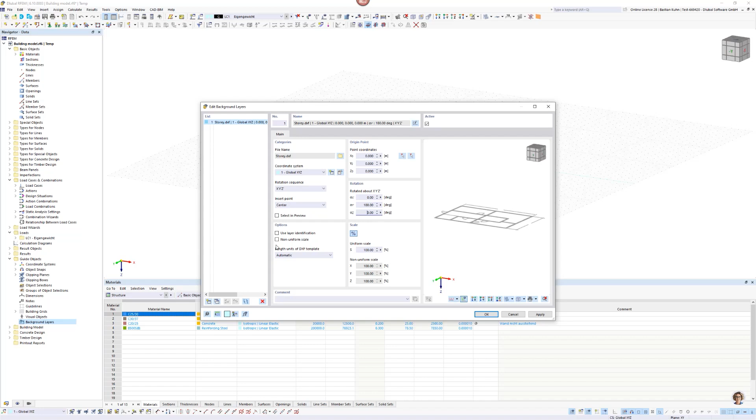When you start modeling a structure, you usually do this via DXF import. It's possible via File, Import, using the import functions, or what's even smarter is to go to Guide Objects and import background layers. I have a predefined DXF named Storey. I will change the rotation about 180 degrees to have it on the other side. I can check if I have separate layers, which is the case here, and import it. I will directly move into the Z direction.

Now, looking at the left side of this building, I will define my stiffening walls, my stiffening elements. It goes from the left top corner to the middle corner, the bottom middle, and the left bottom side - that's where my stiffening core of the structure will be. On the right side, I will create the facade elements.

Before modeling it, I have to go into the objects of the building model and define my stories. I want to define 5 stories, with each story having a height of 3 meters. So 1, 2, 3, 4, 5.

We have several options for floor modeling. I'll explain them all when we get there, but we'll start with floor modeling set to nothing, which is just an advanced output of the structure. The other modeling types - rigid, diaphragm, semi-rigid, and also load transfer - require or generate different modeling. Then, of course, when we have rigid or semi-rigid diaphragm, we can also have different nodal support modeling and different line support modeling. But I will show all of that later on.

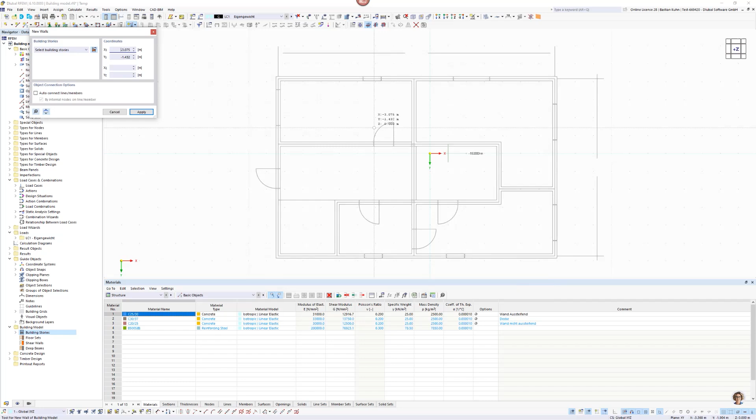And I will now start from the middle top corner. I also have to select the building stories. I will define them all.

I will skip the window, so here's the window to be situated. With the building story or building model add-on, there's already the information of the mass of my structure. Right now I define two walls, or two parts of the wall, and I have a complete weight or mass of 9.72 tons. When I'm moving it out a little bit, that's not enough, but maybe we can go a little further in here. So you see the mass center is moving while I'm defining more surfaces. That's information already generated by the building model add-on.

Okay, so I have to do this now for each of these parts for the complete kernel, and to this edge, to this edge, and from this to this. So my building is closed now, and you see that the mass point or mass center is nearly in the middle of the structure, and I already have a weight of 42 tons.

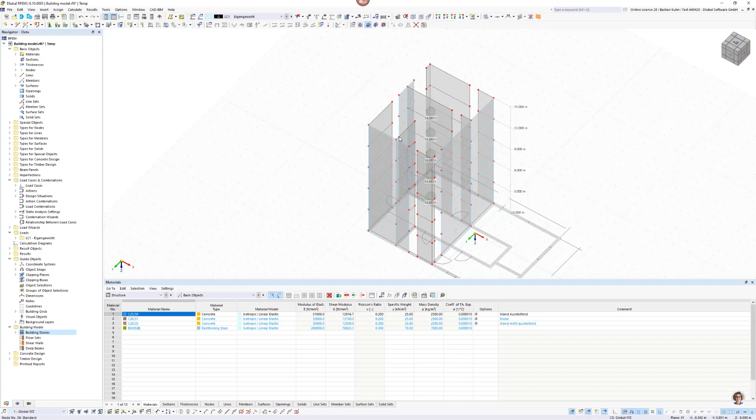And of course, in this case, we will need a few more posts, and maybe we will put some kind of drywall or masonry wall or something like this on this part in order to reduce the free span, because if I do not activate these walls in here, I will probably get problems with the deflection or vibration of my structure.

So I will proceed with the columns. Therefore I will define, well, quite a bigger section inside here. Let's say we will create a new section and give it the dimension 275 by 275. We can use timber material here, the so-called Baubuche, which is perfect if you have quite a high pressure force there.

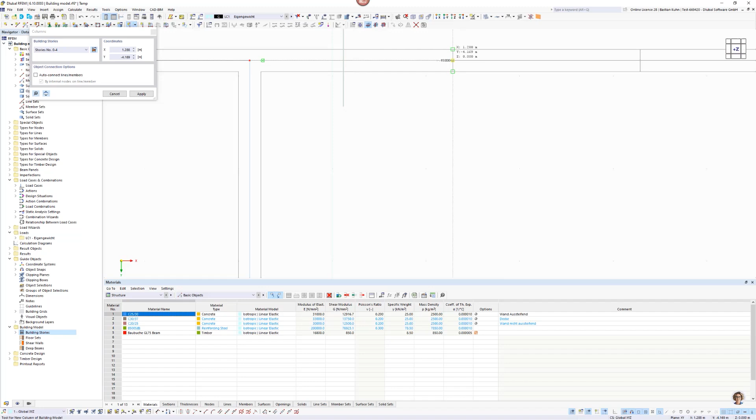And I can take a look if all stories are activated. That is the case in here. So I will say, okay, I probably have a column in here, and a column there, and one on the edge here. And where else can we have one? Yeah, probably here. This. This. This. This.

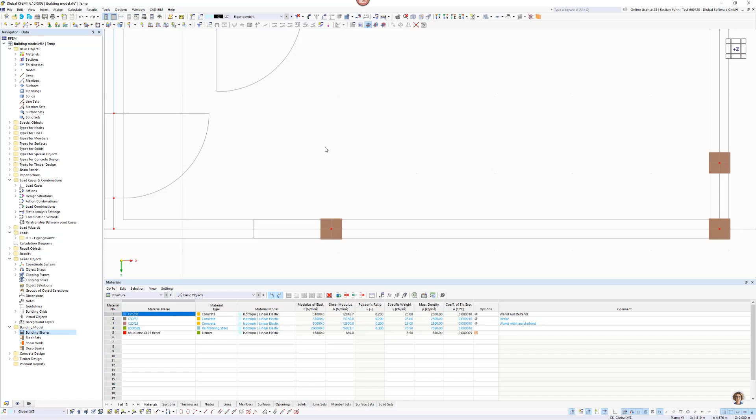Oops, that was wrong. Oh, I can just go one step back. And that's still working. Okay, so these are my columns. This one's actually a little too narrow to me, I will undo this step. So that should be enough for this now.

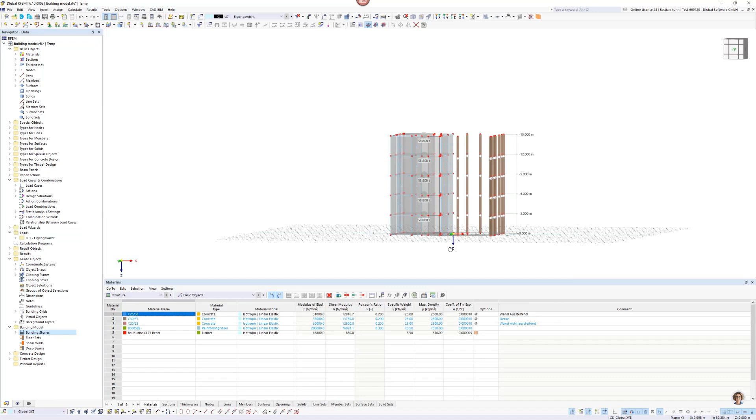I can directly put a hinge on top of those columns so that they will not bear any moment transfer. So I say, okay, hold on, not the walls, I only want to activate the members. Edit, and define a hinge at the member, just a simple ordinary moment hinge. Okay, so that works.

And go back into the Z direction, or maybe I will define now already the supports, at least the column supports. That is also just a hinged support here. Okay.

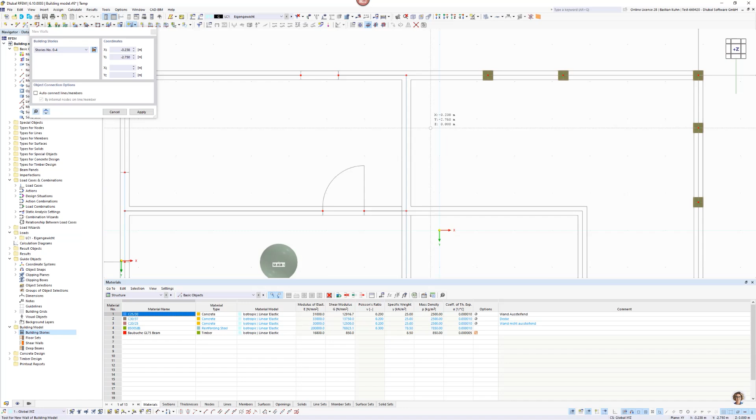So the load transfer surface can be quite simple in here, from this edge to this edge, and to the bottom edge.

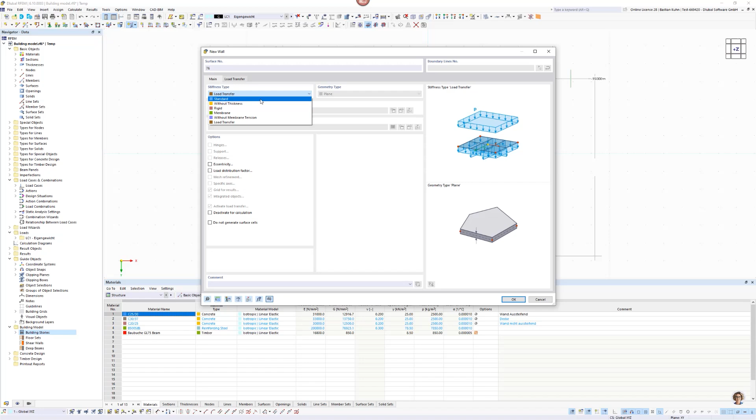Okay, so it's also there. And I said here in this area, I want walls that do not stiffen my structure. They should only transfer the forces from the top story to the ground.

So therefore, I will define again the load type wall, but with standard behavior, and create a new thickness called wall shear free. The picture slightly explains this thickness type, which can transfer forces into the global X and Y direction of the wall element.

I'm choosing a different material, let's say wall not stiffening, and it can be a little bit bigger. Let's take a look at what I wanted to have inside it. Let's say, okay, we will take it 175.

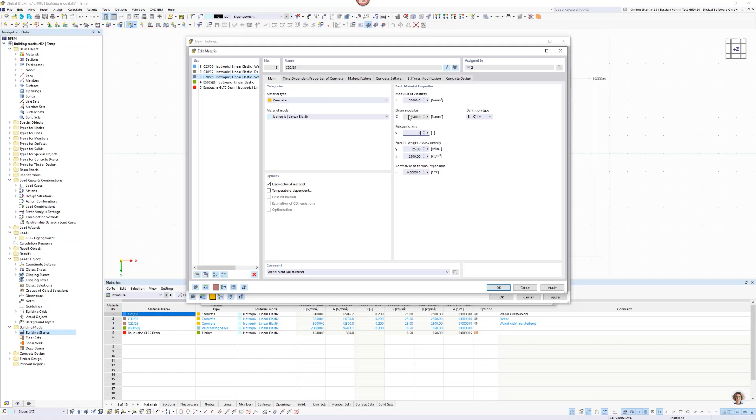We will take a look at the material and get rid of the Poisson's ratio in order not to get too many effects to the stiffness matrix. Just for your information, there's a generated stiffness matrix from this thickness type, which only has stiffness in X and Y direction of the surface. So that's how the forces are transferred. There will be no bending stiffness, or nearly no bending stiffness, which means in case there is force out of the plane, it will get a high deformation, but this can be ignored. It only transfers force from this edge to this edge.

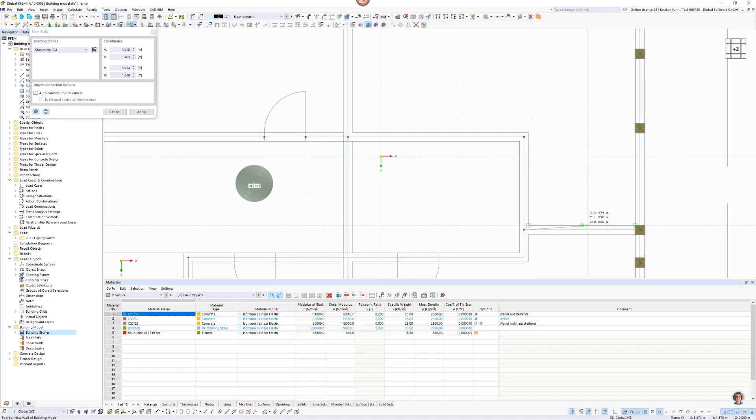So then I'm defining the first selection here, the first wall there, and this should be from this part to this part, and this to this. Did I activate all the stories? Yes, I think so. Okay. And from here to here, and here to there. So now my walls are defined.

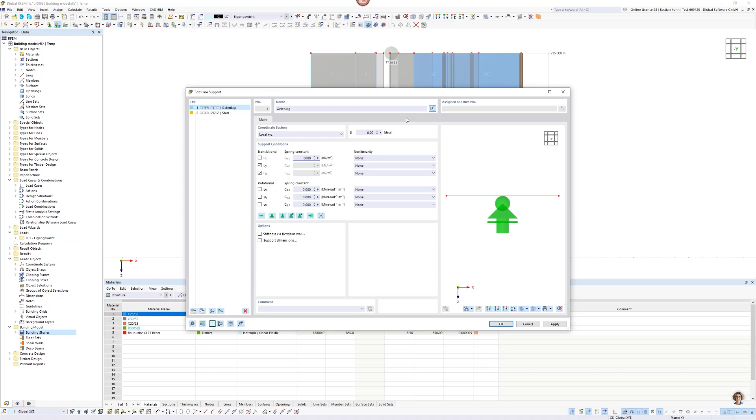And I would like to add the supports on it. For the supports, I'm choosing a line support with local orientation here. In case I'm using timber material later on, I will have to do it anyway, but I also could use a spring constant for the concrete, just to not have it statically over-determined so many times. That's also an advantage of this.

Now hold on, maybe we don't want to see the load transfer surface, because that will just cause effects we don't want. Therefore, I'm activating the load transfer show reverse visibility. So this avoids that. That looks quite good to me, and the local orientation helps also with this.

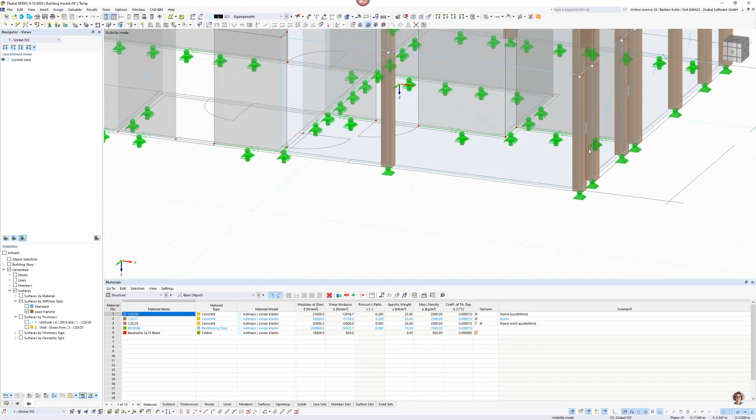Hold on, yeah, that did not work, but okay, of course I can also delete it manually in here. This is okay, this is okay, and here on this side, that can also be. So that's, we just don't need it. It would just cause an alert, so it's not problematic, but I just want to avoid this.

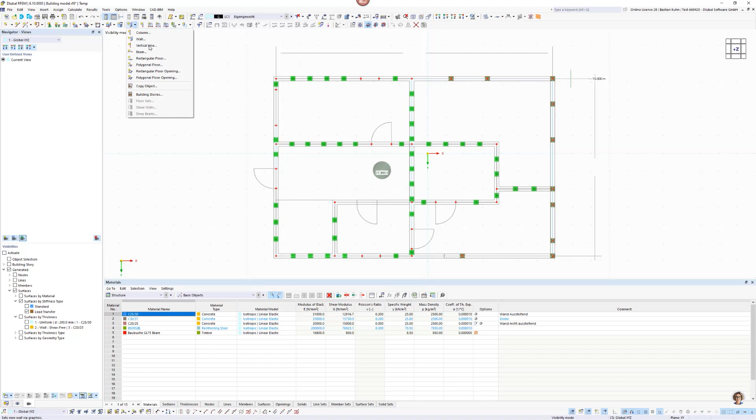Okay, we go back into the Z direction. We could have also looked for the supports there, that would also be possible. And the last part is the modeling of the floor.

We choose it rectangular to keep it simplified, and define a new thickness, uniform, floor with a dimension of optimistically 250 millimeter thickness, and go from the left top corner to the right bottom. Oh, that's not good.

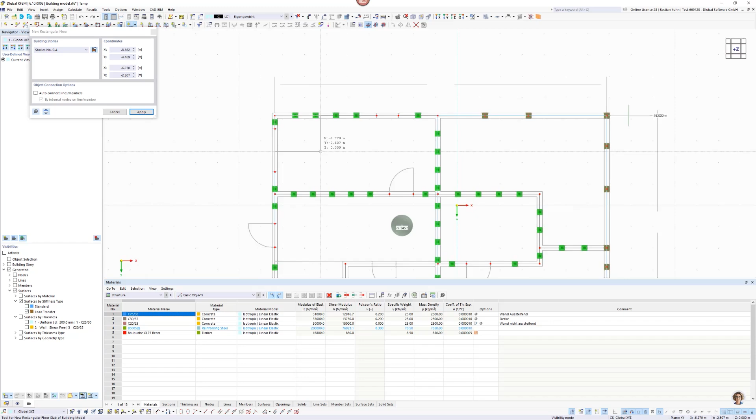That we have to do again. Sorry, I was too quick in selecting it. Okay, maybe zoom in a little bit, and this does not happen.

So now the structure is done. Each story has a mass of 172 tons. This is it, and now we have to look at the loading.

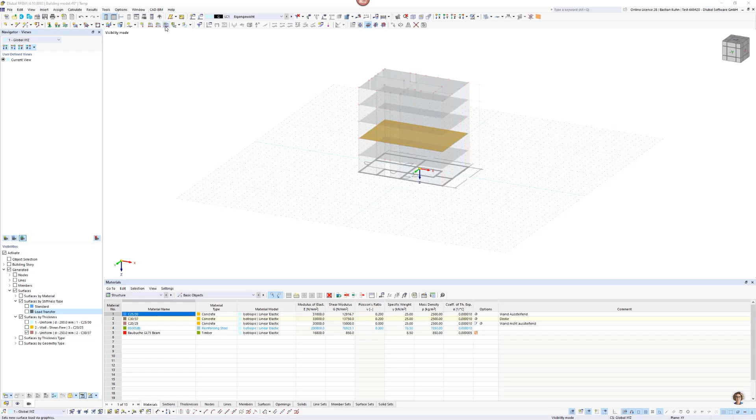Therefore, I will only activate my floor for the first load case and will define the load in it. So there I can use a simple surface load in here with a value. Hold on, I also have to look at what I defined in here.

So not so much load, 1.5. Oh come on, is it not selecting it? So on each story I want that 1.5. All right, and it's there, and I will define two more load cases, one live load and one wind load.

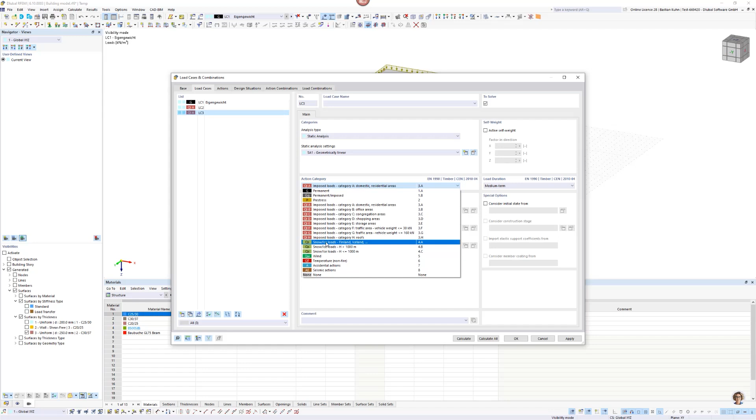When defining those, I can directly say, okay, I don't want to use the combination wizard in this case, I will define that manually. Design situation, I will also look for ultimate limit state and skip all the others, and define two load combinations according to first order theory.

And the first one should have the mandatory, or the main loading on load case 2, so that's 1.35 added load case 1, plus 1.5 added load case 2, plus 1.05 added load case 3. I will assign that, and then do the same for the other side, but here the main loading will come from the wind load, in this case load case 3.

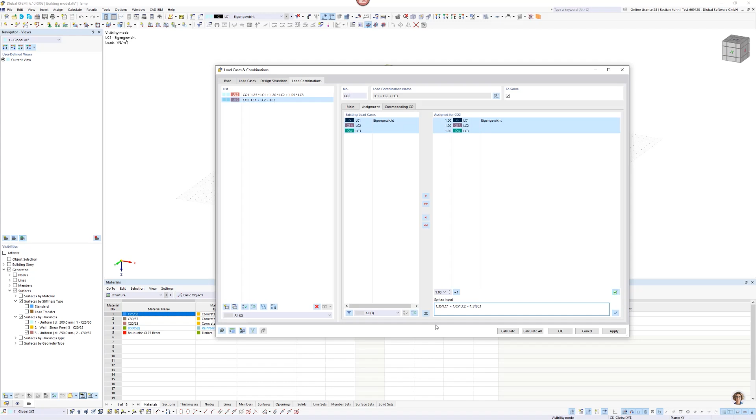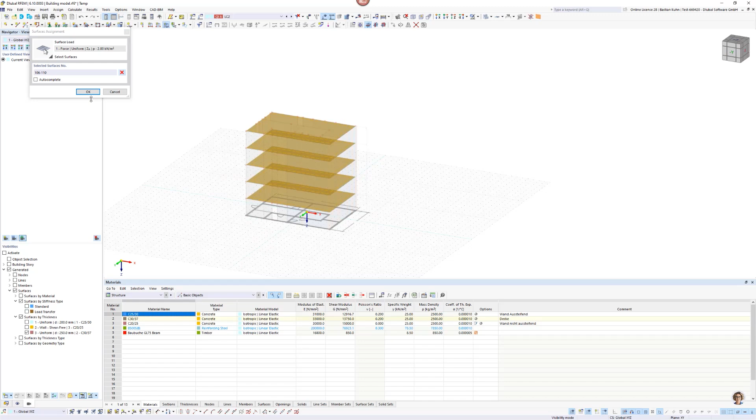Right, so okay, that's defined. We have to define the loads for load case 2. Therefore, we will use a force load with 2 kilonewton per square meter.

Okay, when we go into the load transfer and the wall thickness, I can also define the wind load with a surface load of 2 kilonewton per square meter on the weak side of the structure, which will be in the y direction.

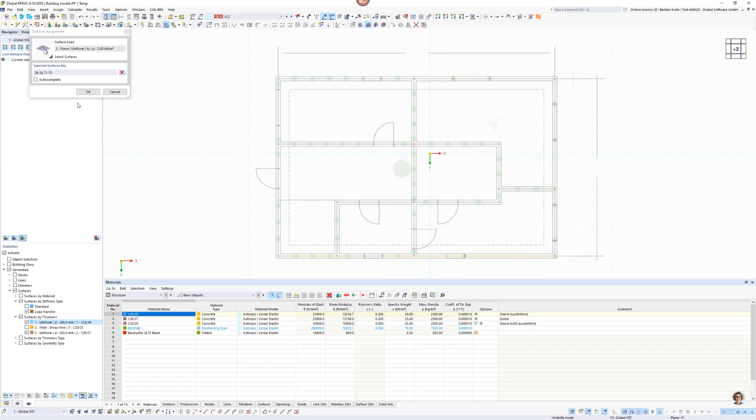We can move again to the z orientation. Right, and of course it probably has to be minus. So that looks quite good, and it is assigned then in here.

Oh, but I see it was the wrong load case where I chose it. So we will undo this and go to load case 3 and define it there again. Do the same, so minus, and so on.

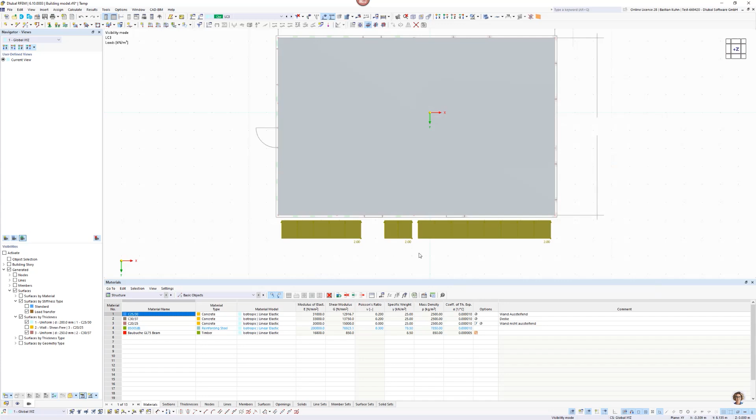Cancel the visibility mode. So that's for the wind load, it works, for the live load, and also for the self weight. The load transfer surfaces themselves are not such an elementary function.

I said it already. For detailed information about the load transfer surface, I have to refer to the different webinar from my colleague Niklas Wanke. But just to show you what it's doing here, I will let load case 3 calculate with the wind load.

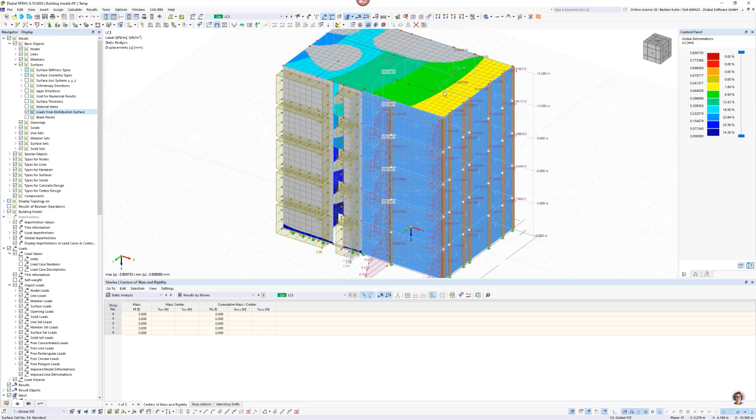Okay, so that's not what I'm interested in now. What I want to show you is the load transfer. Here in the display navigator, via surfaces, you have the selection loads from distribution surfaces, and there you can see what it's doing: transferring the horizontal force here to the edges of the floor and also to the columns.

But for the other ones, we do not have to look for the load transfer surface, and therefore we will change that by just showing the load transfer and showing the reverse visibility.

So right now, what information did I get from my building model add-on? I have the information, but I will also skip the view of the mesh, it's not so interesting. I mean the mesh is nice, but we're not so interested in this here. And maybe also not show the surface cells.

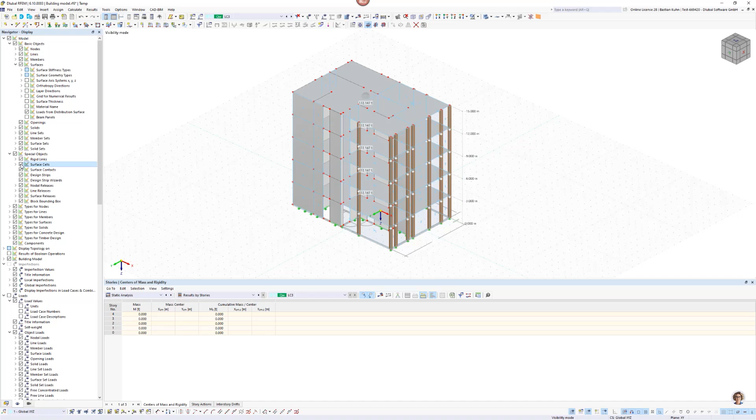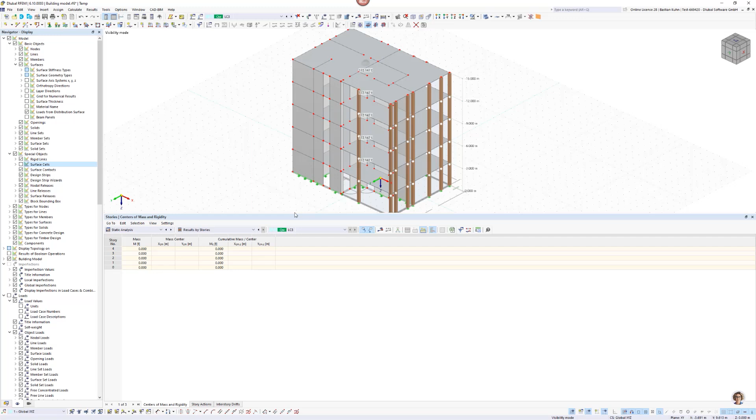So I have the mass center here, and already by this information that I have, I have in static analysis, as a chapter, a column results by story, and there I will have of course the masses. Well, but not in load case 3, we would probably have to go for load case 1.

Okay, so you see in load case 1, we have the masses with the load that I put onto it. I have the mass center, I have the action in each story. I have story forces that are transferred, and the location of the resultant story and the interstory drift.

I have also the option to display this force graphically that's coming into it. Therefore, of course, load case 3 can be more interesting, as it shows the horizontal force in X, Y, and Z direction.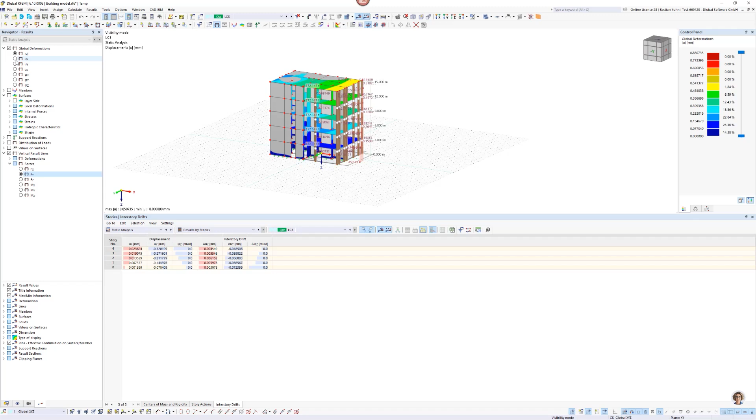Of course Y is in this case more interesting, and that is this. Additionally, I have even more options with this, I can name walls that I'm more interested in. So when I take a look now at the forces, we see the deformation here. And if we do not display the model, you can have a detailed look onto it.

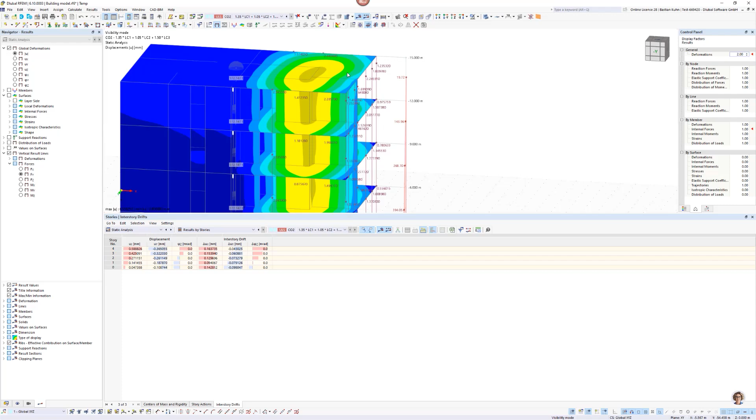So the deformation is really not big, but maybe when we go to the wind load, or to the load combination where the wind load is the main guiding load, there is a little bit more load that can be seen. I said it already, because of the weak bending stiffness of the shear wall, you have some local deformations, but if you look for the local deformation, it's like a little bit turning in this direction, which of course we would like to see here.

And when we now look for the force in the surface, the shear force in each wall, you will find out that okay, the main load is coming here on the inner wall, where of course you have the stiffening part of it.

So how can we regard that? I will put the model back on, and for this edge, and maybe also this one.

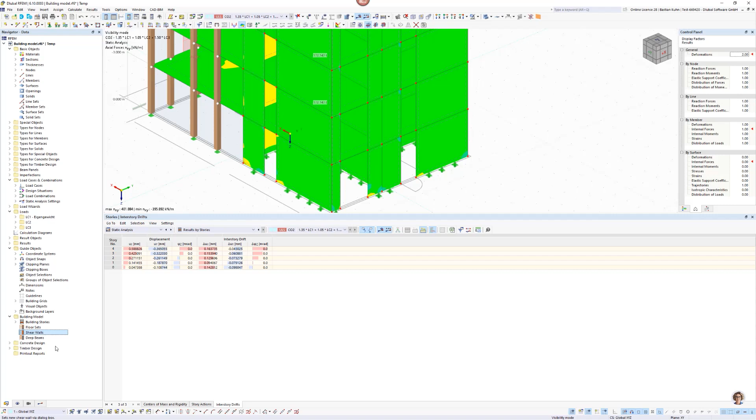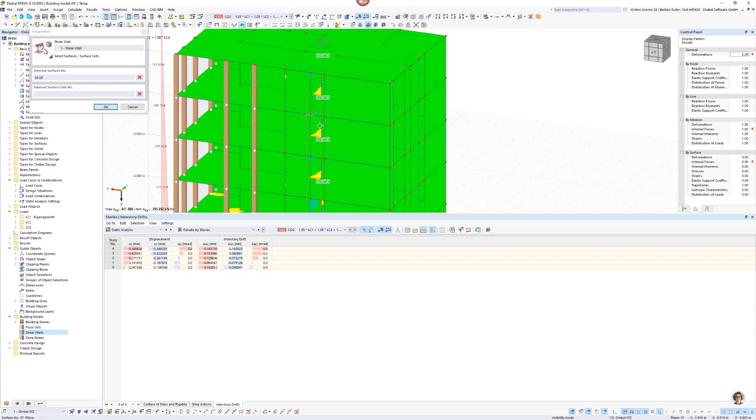So I have one in global X direction and maybe also this one in global Y direction. I can define in the building model add-on floor sets. They are created automatically, but I can create shear walls. I will define shear wall in here. I can select surfaces and surface cells. Surface cells are perfect in case you want to create timber frame walls in it. But for our purposes right now, this is a concrete structure, so it is sufficient to use the usual surfaces.

And then I can generate a result section here. I can design it. The design properties are activated, and for concrete, I can do a stability analysis with the concrete add-on in it. I have the covers in here, reinforcement, and so on.

But here in design configuration, that's an interesting part I wanted to show you from the building model. It is choosing the deep beams and also the shear walls from the building model add-on. So the software will automatically put the reinforcement in accordance with what is activated in the building model, from this wall into this surface that I'm defining in here.

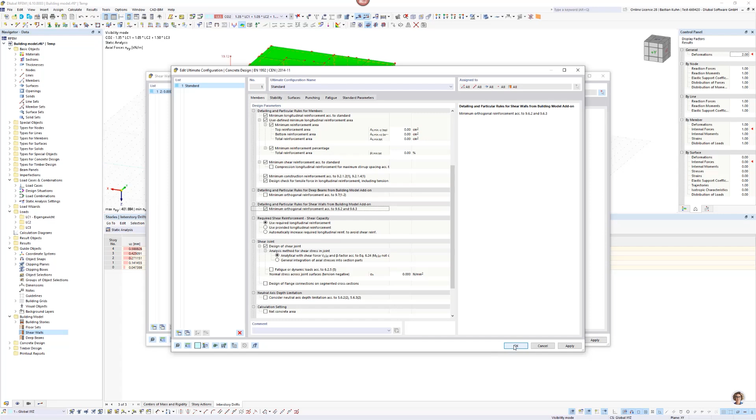That's quite important information. So we can do this on one side, and as I said, I will, as an example, also do it on this surface. I will also generate the result section and press OK and apply it.

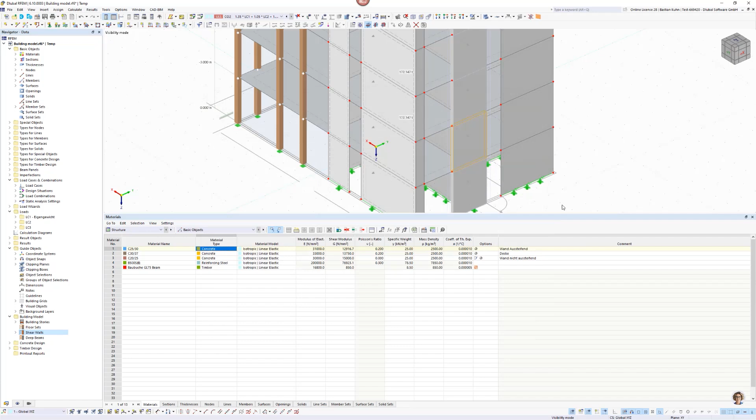Well, okay, so far not much has happened in the structure as I do not have results, but you see that I have now the sections here in every story, and also a result beam is generated automatically. And via this, the design is done. And when I'm calculating the combination 2 again...

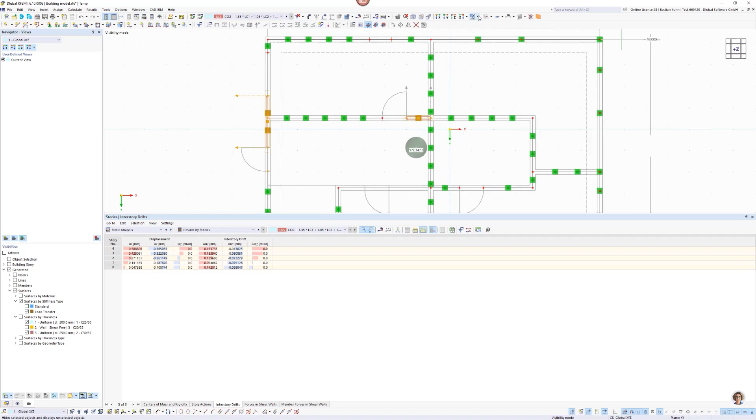Then I have now the result section in here, and maybe we will just look for our result sections, so we'll only display them in here. Maybe we'll skip the concrete information on it, as we are not so interested in the reinforcement right now.

And so now when we activate the resultant, let's say we will choose the section on top of each of this—oh sorry, that's the wrong one—of this. I have now on the top story of it the vertical force, then additionally for the wall underneath this, the next one, and also the horizontal force. So all the force I can have graphically in here.

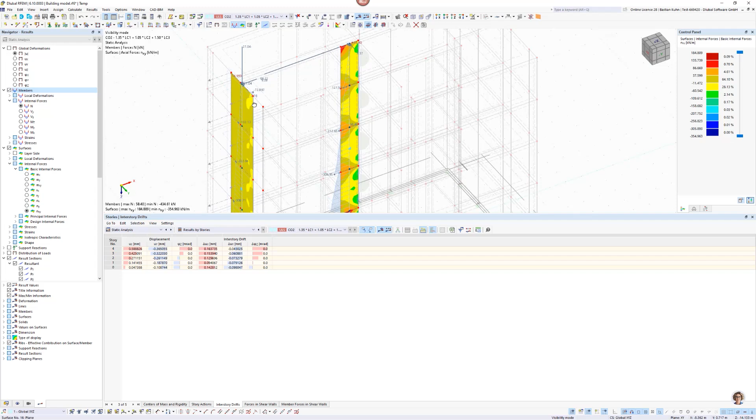I have the section of it, and I have the member forces in it, so I can also see the normal force here, so 127.5 kilonewton I have here in the graphic. And let me show, I think the previous visibility will work. Yeah.

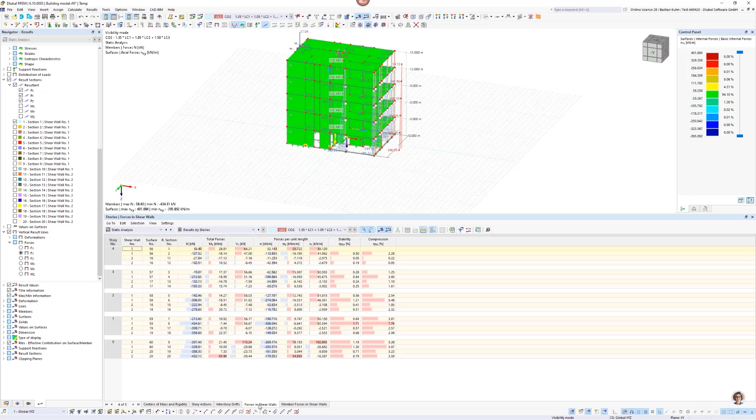So I have all this graphic output of it, and I get now the additional information about the forces in the shear wall, or this column, that I did not have before, and also the member forces in the shear wall. And here in the member forces and shear wall, you also get additional information for the compression and stability, so what the critical compression load compared to the force that's putting onto it is in relation.

So you see, we are far away from any problematic critical stability issue. That is just an indicator that can handle a lot more force into it. Okay, so this is the information you will get by the building model without changing the floor modeling.

Now, what happens when we change the building stories modeling to the already mentioned rigid diaphragm? So first of all, when I activate rigid diaphragm in here, the nodal support modeling can be chosen or defined, but I will keep it now with fixed hinge support and select OK, and it requires that the mesh is deleted, of course.

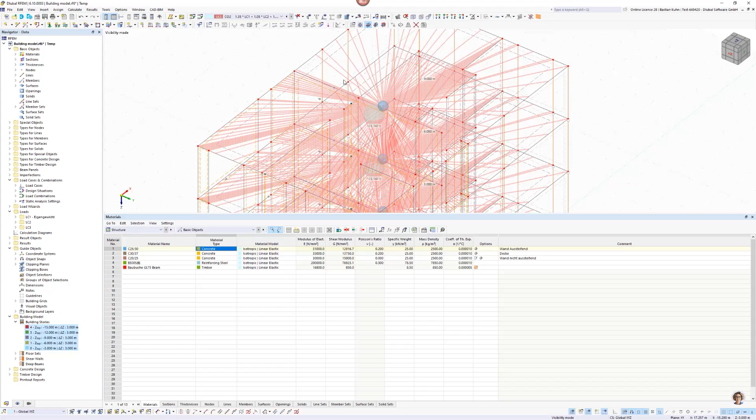So, and then from the mass center of the building model, to each FE element of my structure is defined a spider connector, or it is named—hold on—rigid links inside. I will skip showing it because it's not so interesting, but it is important for the modeling.

And when we select now one of the stories, or maybe even better, if we look now for the building model in the data navigator, you see that additional floor sets are defined in here, and this is overwritten into our story. So there was a stiffness type standard, and this is now overwritten by floor slab rigid diaphragm, and there's chosen the load transfer distribution isotropic FEA.

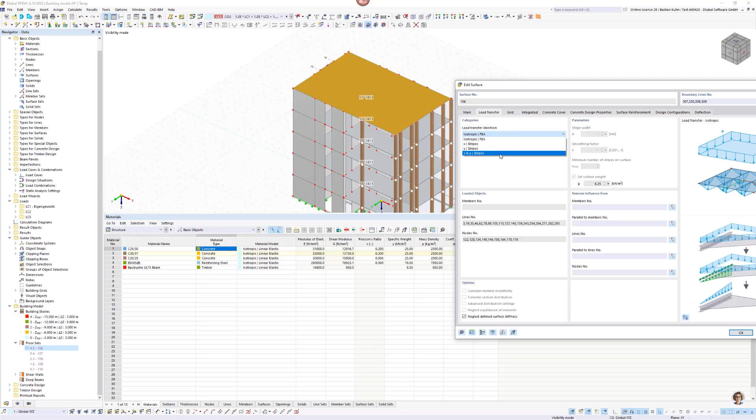And similar to the facade walls that I defined, you can also choose the strips method, with what I will do now just for showing you what this means.

Hold on, select them, edit, and I would choose XY strips and uniform. This is one of the new advantages of the building model add-on. A few weeks ago it was not possible to define a facade wall with a load transfer and a floor with load transfer. It was just not possible, and now it is possible here.

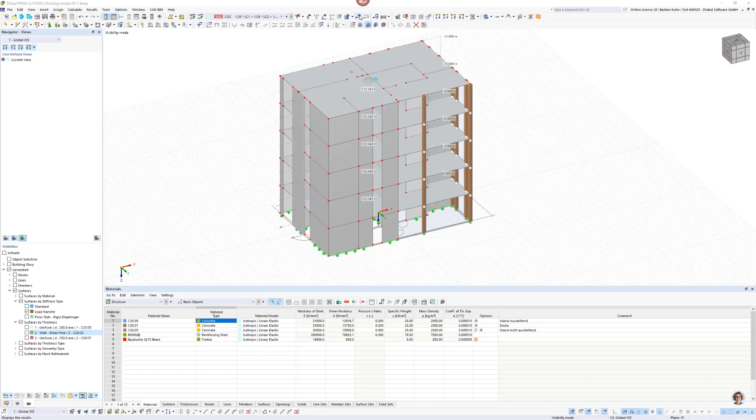Okay, so far that's the only difference, and we can also calculate the results of the combination two.

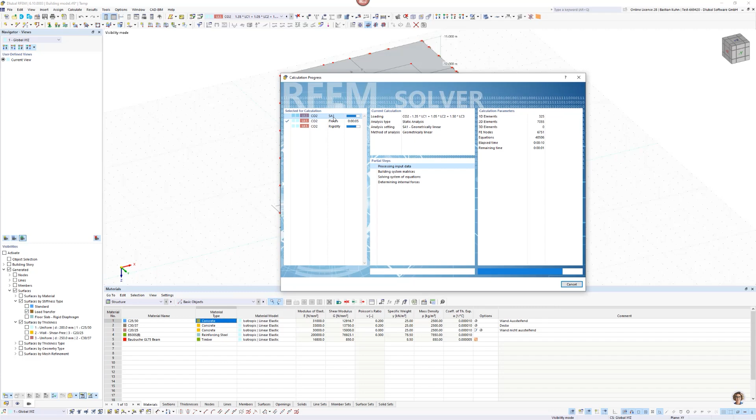I don't know if you saw it, but there were actually three kinds of calculations done, and in connection with this I also have three types of analysis results. In the data navigator on top, I have walls, floors, and walls and floors global local calculation. The walls themselves calculate the forces in my walls, and I have the results by stories in here in order to put the output out of it.

Additionally, I have here the center of rigidity. So when we skip this and go into this view, you see that we have the mass center. Maybe we will also skip the result sections here, I'm not so interested in this now.

Activate here on the bottom in the result navigator the center of rigidity, and then you see that the stiffness is different from the mass center, because it is on the left part of the structure, as this is the part with my stiffening elements. Here I only have the load transfer surfaces, and I have the walls that do not transfer any shear force, and these columns also do not contain any stiffness in horizontal direction, either Y or X direction of the structure.

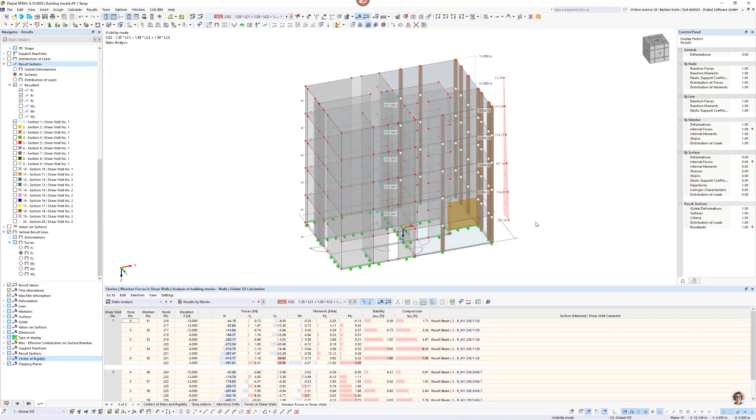All right, maybe we can also get rid of the grid. Okay, so you get this information and also this information here. This is all important for the walls.

I will activate the global deformation here. We have this little local point in there, but that's not so important. Here I have my shear forces inside, that is the important information I'm receiving from this, and that's the information of the walls.

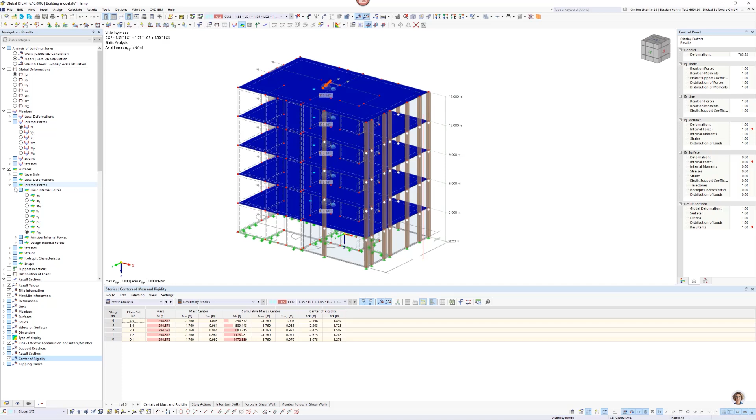Here I have the information of the floors. Of course NXY is not important information, but here I want to look for the bending forces in the floors and also the deformations of it. So when you design the structure with each position separately, this is what you would do as well. We have separated or reduced the number of results here for these floors.

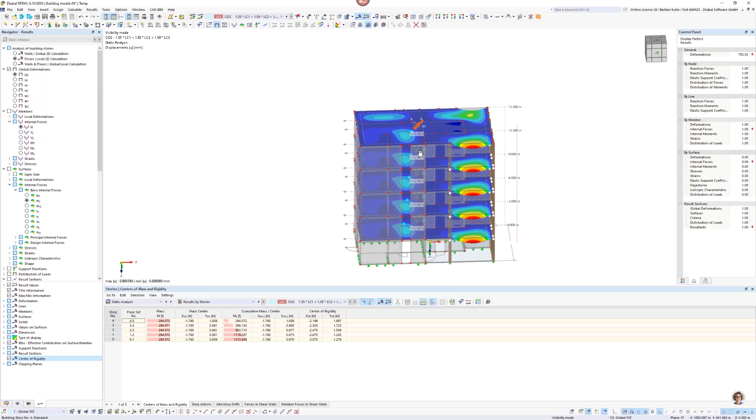And then the third one is walls and floors in the global local calculation. On the floors, I think it's easier to show what this load transfer, sorry this override line, is doing here. So we maybe look for the self-weight of it, and you see that now the loads from distribution forces, so the 1.5 kilonewton, is separated via this load transfer to each part of this. So this is how this is done here.

I have also prepared a detailed example of what is done in the background, but before I do so, I will just show you what it's doing for your information. So it's using the force from the 1.5 and saying, okay, 7.96 I get from this story, and I put it to the wall and directly on the one underneath, and so on. That's how the building model, or the intelligence of the building model add-on, works.

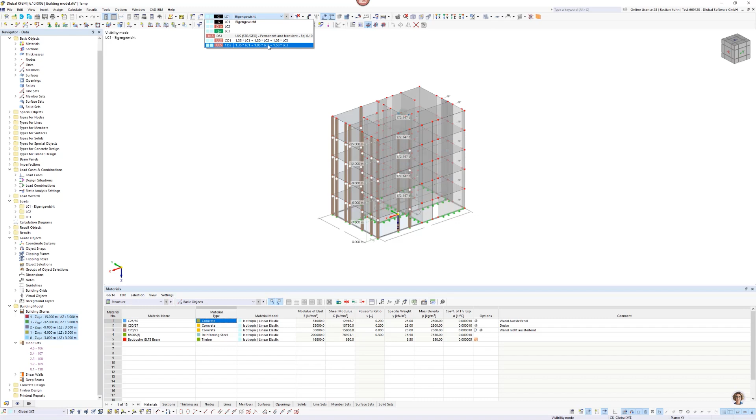Okay, I will go back to isotropic, as this is the quicker and better load transfer direction type. Before I show you the internal submodel that is generated during this process, I will just, for your information, hold on, what we will do - we'll go to the combination and look for the deformation in X direction.

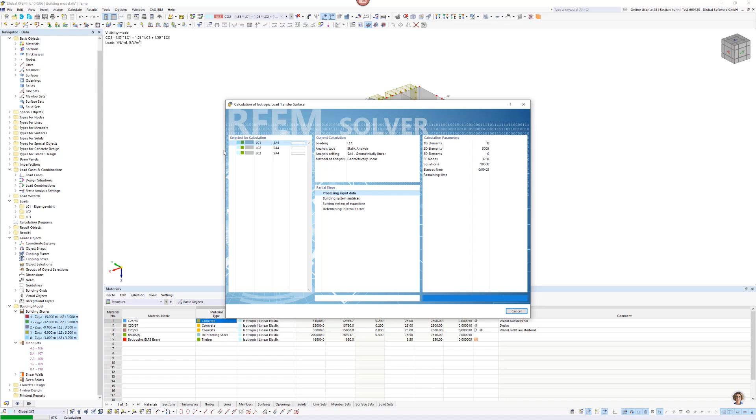So you see that now the force is really different that is transferred in here. I would like to also take a look at the self-weight of it.

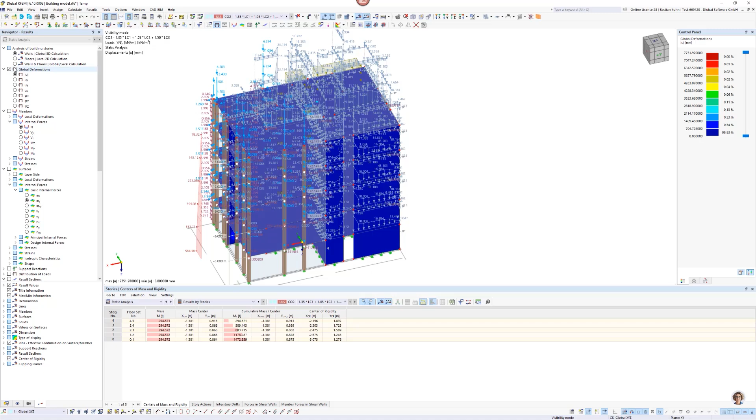So okay, now I'm changing it, and I will look for why it goes at 0. So we have to go for the walls. Maybe we'll take walls and floors calculation and not display the shear free walls in it.

So we have here a deformation of 10 millimeters, and here let's say we will choose this one.

That's probably something. So the wind is blowing in this direction. So when we put it a little bit more in this, okay, so you see that it's moving out of this plane area.

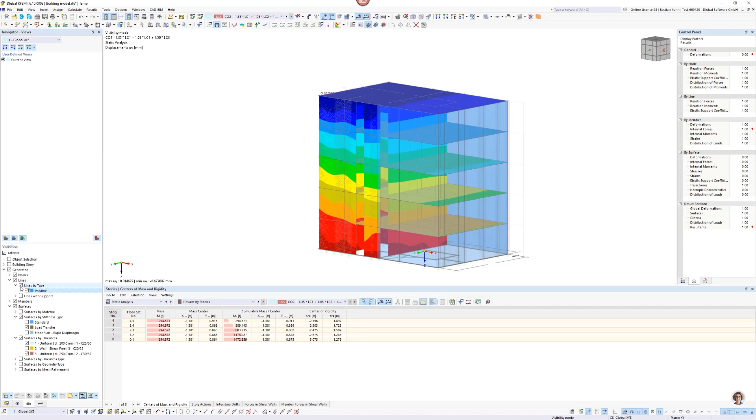Maybe nodes can be shown, and also members and lines, of course. Why is it not doing this? So here, this one, and nodes also. Okay, so you see now the deformation.

And now I'm changing the nodal and the line support modeling in the rigid diaphragm, and I would like to choose the type. I think I choose hinge rigid, and here also hinge rigid. I think it was this amount, but it is not that important. I will show later on what this is causing.

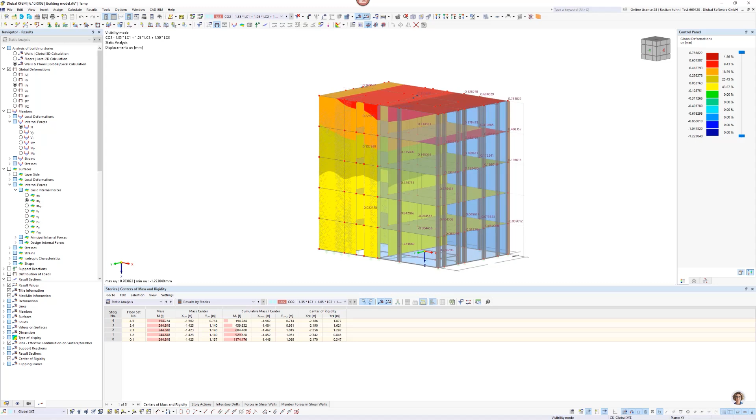So what did the software do now with this here? And therefore, I have this different model that I would like to show you. I would put this on this side and this one on the right side and show you what this is doing.

So I have here modeled three types of submodels that show how the software is separating the force into it. So this one is the first definition that I did in here.

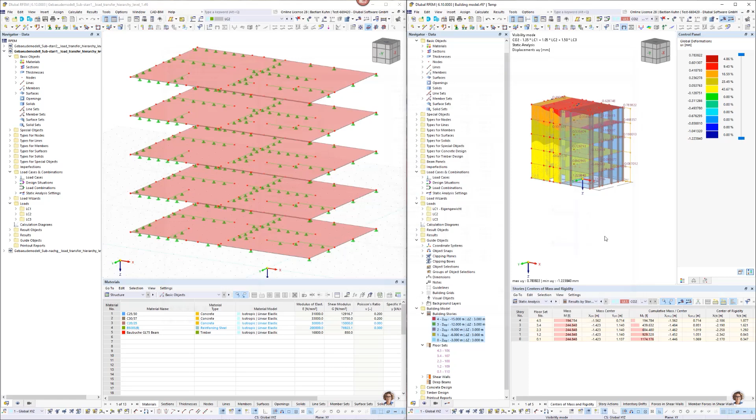So when we go back to this one building story and say okay, rigid and also fixed for all definitions, it's again deleting the mesh, and we look for the load case 1 with the results on it. And here we will also look for the load case 1 with the force on it.

So you see here in load case 1, we have the weight of it, or maybe we will go to the load case 2. Actually, I think that is better because we do not have the self weight of the quite heavy concrete in it. You see, I have here

the very stiff surface. For your information, it's always possible to see the stiffness matrix in this, and each point here is modeled with a support, each story.

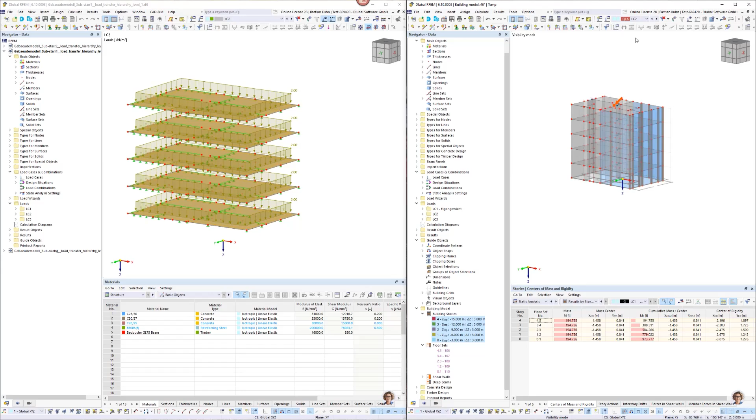Okay, I said it, I want to have it on load case 2.

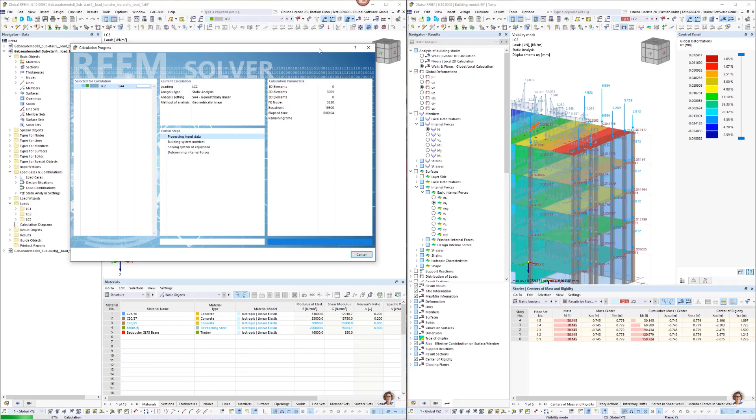Okay, and now I'm activating here for the load case 2 my load in it, and also let the load case 2 of this structure calculate. Okay, and look for the reaction forces.

So now that we've calculated this, I think let me maybe reduce the decimal places a little bit of the result. Regard that now is probably too much, not so important in here, but it can be a little bit confusing.

So if you look for this, you see that what is done in the global 3D model is the force that's separated via the load transfer function is what I receive as a result in this model that I created. And this is, as I said, containing the supports hinged here on every part and a very stiff stiffness matrix.

And now the question was, how is it changing this submodel when I change the building stories in here from a little bit out from fixed to elastic column hinge rigid, and of course also for elastic wall hinge rigid. That was the example. Therefore, I created a different example.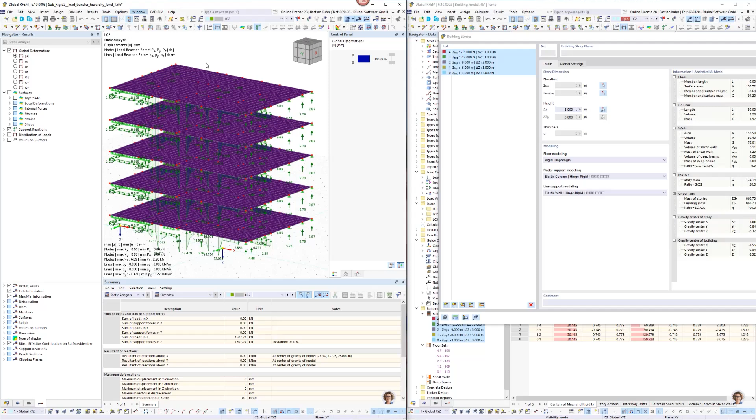It's called submodel rigid 2. And there you see, first of all, okay, the surface, that's the same. It's the same stiffness, so very stiff in here. But the difference here is that the line supports and the nodal supports

are now changed. They have a spring constant, linear, and this is defined now with this spring constant. And that is exactly what is done when you change the nodal support and the line support modeling in here. It's taking the wall width, which is 20 centimeters, the height of the story is 3 meters, and because of this material, it's calculating this stiffness in here. And as you see, it's hinge rigid, just what I defined in here. I can also look for the columns.

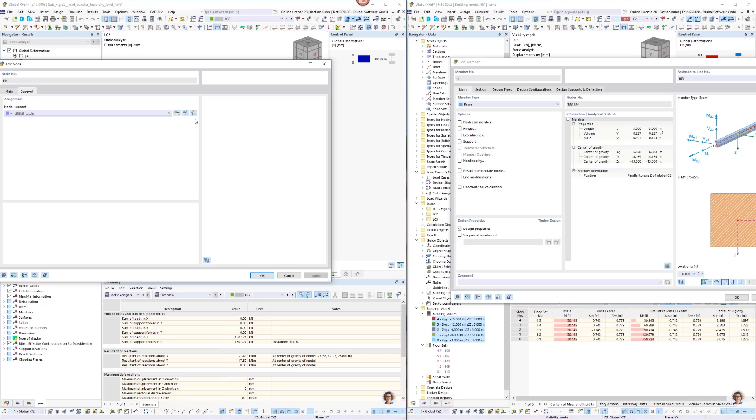If you remember, for the columns we chose this dimension, 275 millimeters thickness, Baubuche material. When we added the nodal support here, you can see that these dimensions are also transferred into this submodel. That is the intelligence of the building model. Now what happens when you say, okay, I don't want to calculate with concrete, I want to calculate with timber material because it's a nicer, more ecologic and also more economic material to use?

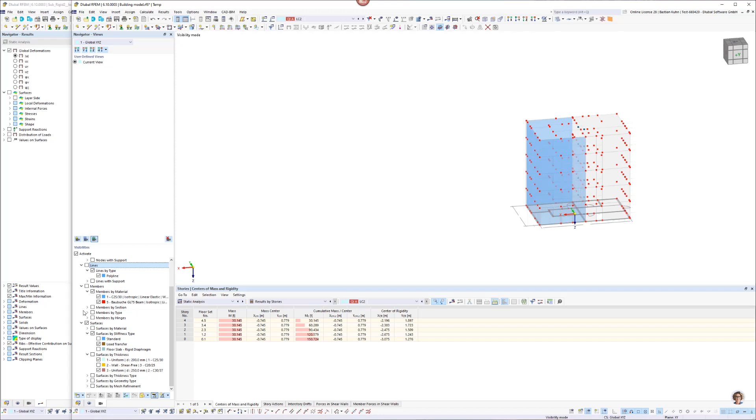How can this be done? Let me first get rid of the load transfer surfaces. So imagine we say, okay, we don't want this shear wall type here anymore, we want to have CLT here inside. So we change that and remake it, and it will be layers.

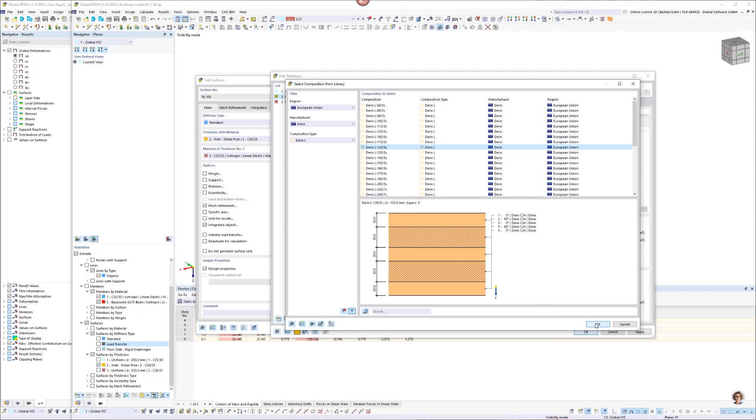We go into the database and choose a quite thin 5-layered thickness CLT plate, and change it. I'm not doing this in completeness now, but the floor should also have couplings inside here, because this is roughly 50 meters from this edge to this edge. That can be produced and brought to the job site, but not for the complete width.

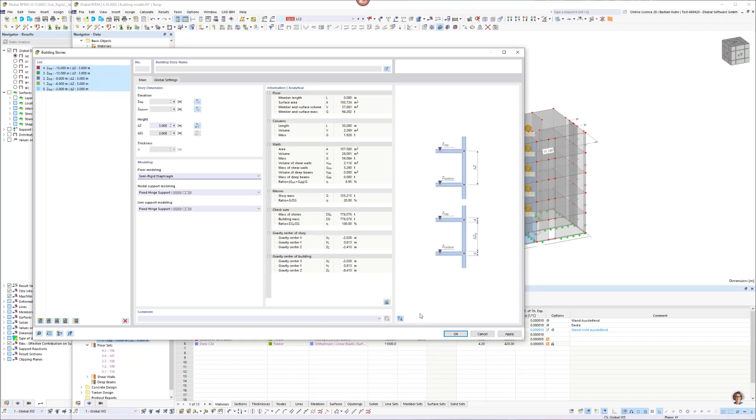So there has to be some kind of connection, and this has to be regarded. That does not work with the rigid definition here. If you remember, rigid links are defined into each edge. So how can this be regarded? This can be handled by the building model add-on with the floor modeling semi-rigid diaphragm. There's no visible change, but in the stiffness type you see the semi-rigid diaphragm is used, and I don't have rigid links anymore.

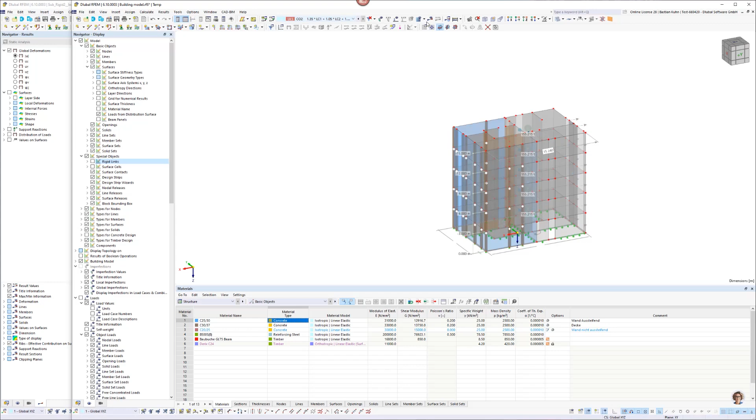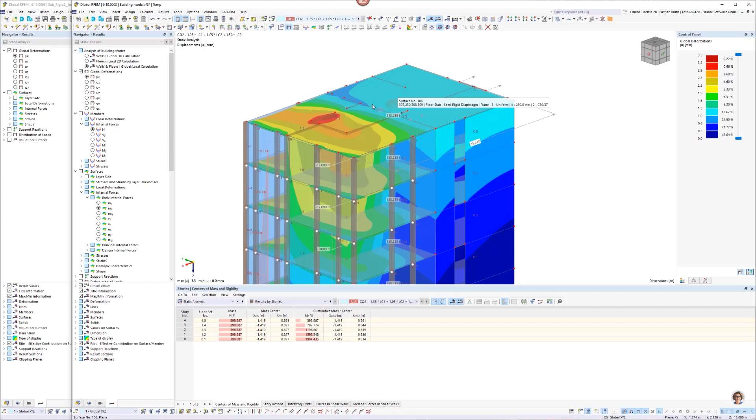And when I calculate again combination 2, you see it cannot be compared 100% to before, but now the floor is not so stiff anymore. I have a higher deformation of the floor in either the walls and floors designed. The floor itself for vertical loads is nearly the same, at least the qualitative deformation looks the same. The output information is also still the same, but as I said, now it is semi-rigid.

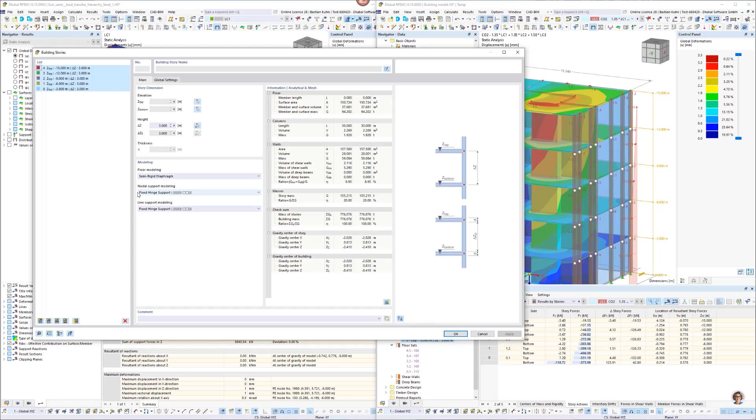And how is semi-rigid done? I made another model here to compare it. That's called semi-load transfer hierarchy. The supports, I left them on fixed hinge support, not rigid, but here the complete stiffness is chosen as it has been defined here.

I hope you gained some valuable information from this webinar. Let me summarize what, from my point of view, was important: now with the hierarchy transfer it is possible to design or use facade elements and put, for example, the wind load for more complex structures directly to your structure.

The semi-rigid diaphragm is a function where you can also regard couplings in either concrete or CLT floors and decks. The stiffness center of the structure is different than the mass center, and the output of either reinforced or not reinforced concrete or timber walls is possible via the design configurations.